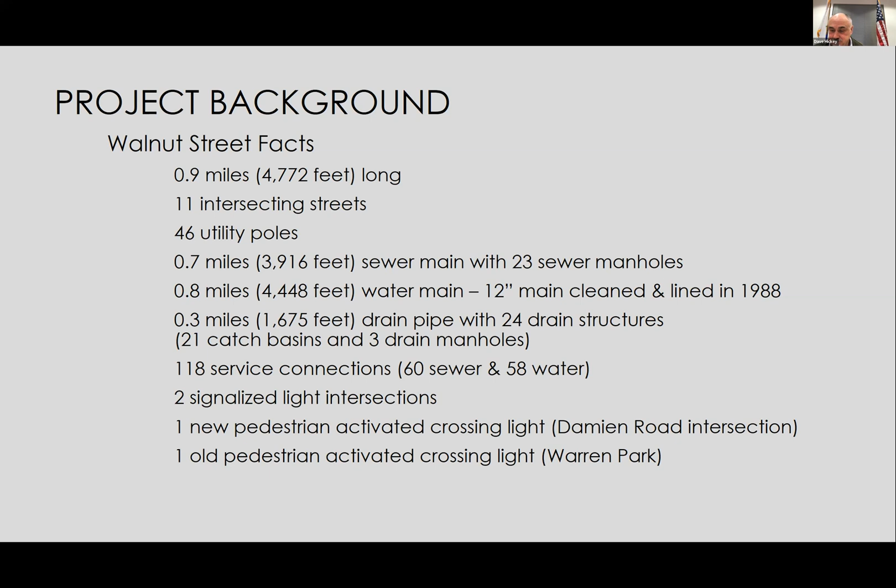Let's try to advance, Dave, since you're working it so well now. This has just got a little more background on the project. For the history buffs in the crowd, Walnut Street was laid out by the county commissioner back in 1886, just 5 years after Wellesley became a town, separating from Needham. It was widened and relocated in 1903, accepted by the town that same year - those probably were joint or parallel exercises. The right-of-way is 50 feet wide with about 30 feet of pavement and sidewalks ranging from 3.5 to 5 feet wide for most of the length on both sides of the road, but not all of it. That's an opportunity and a challenge we'll talk about in a bit. It is classified as an urban collector.

One thing that stands out, at least for me, is this 50-foot wide right-of-way. Sounds like a fair amount, but when you think of a pavement of 30 feet and 2 sidewalks that really should be 10 feet, you can see, and then you still have to fit utility poles, you can see how 50 feet can be a little bit constraining. We'll talk about that in a little more detail as we advance.

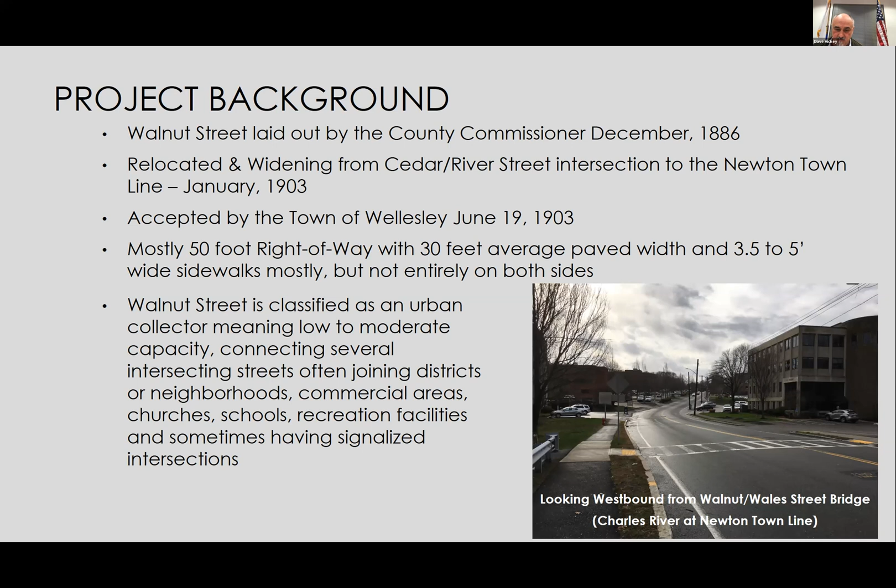I'm a little fearful that most of you are more familiar with these pictures than I would like. We know there are some potholes out there. We know that the condition of the pavement is subpar. And we know that the trenching work, particularly the National Grid trenching work that's gone over the last year and a half, is a problem.

The good news, if there is any for us in engineering, is that we've advanced 15 cores into the roadway, into the subbase, and the subbase looks really good. The asphalt thickness out there right now is thick, averaging 6.5 inches. So we're developing a plan that would cold plane or grind down the top wearing surface of the road that's lost its elasticity and structural capacity, and then replace that.

We might also look at some intermembrane layers that would put some elasticity and adhesion between the base course that would be left behind and the new wearing course. That's something we did recently on Grove Street, if anyone happened to see that process, and we've done it in several streets in town, and found it to be pretty successful. In some ways, it's the current replacement of that fabric you see in that left picture, only performing much better than that fabric, which was at its time state of the art for pavement.

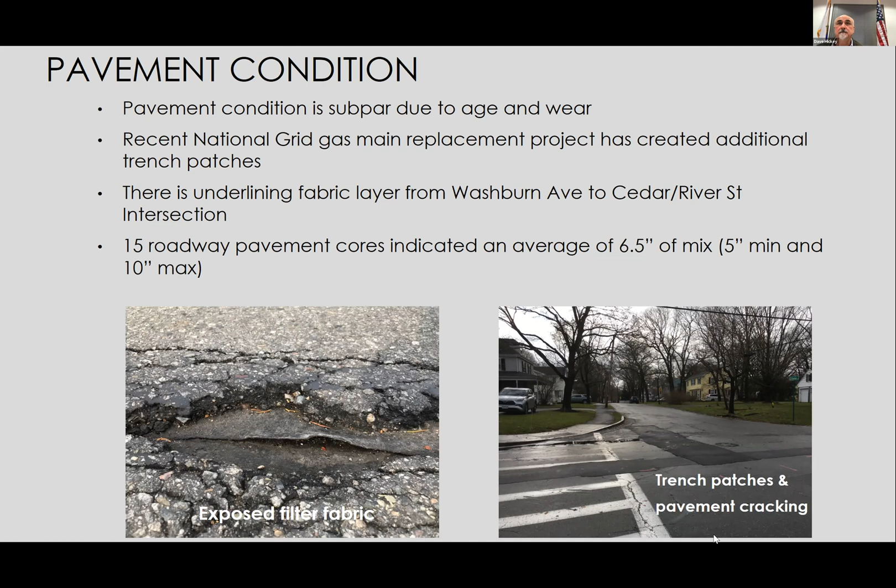The next few slides, I'd like to just talk about Walnut Street, its connectivity, and some of its most important street functions that I'm sure many of you who live there are familiar with, but maybe this is a bit of a reminder.

One of the most important things is that the Crosstown Trail runs parallel with Walnut Street for a long section, then joins up and runs contiguous with Walnut Street for about 600 feet. So it's an important connection point, and one that we want to think about as we consider reconstructing the road.

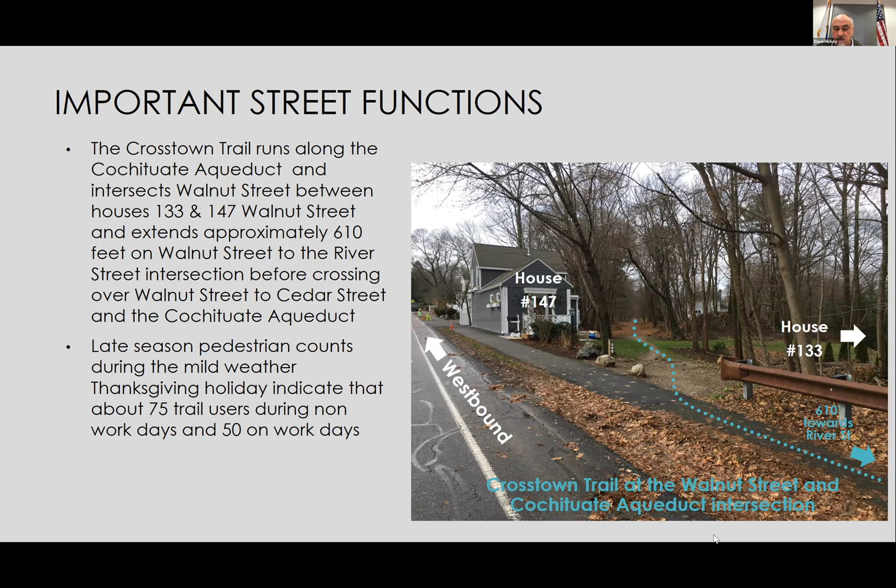We did some pedestrian counts on the Crosstown Trail itself. This was a while ago, after COVID, but it indicated that there's a regular amount of activity. We found 75 trail users during a weekend and 50 on a weekday.

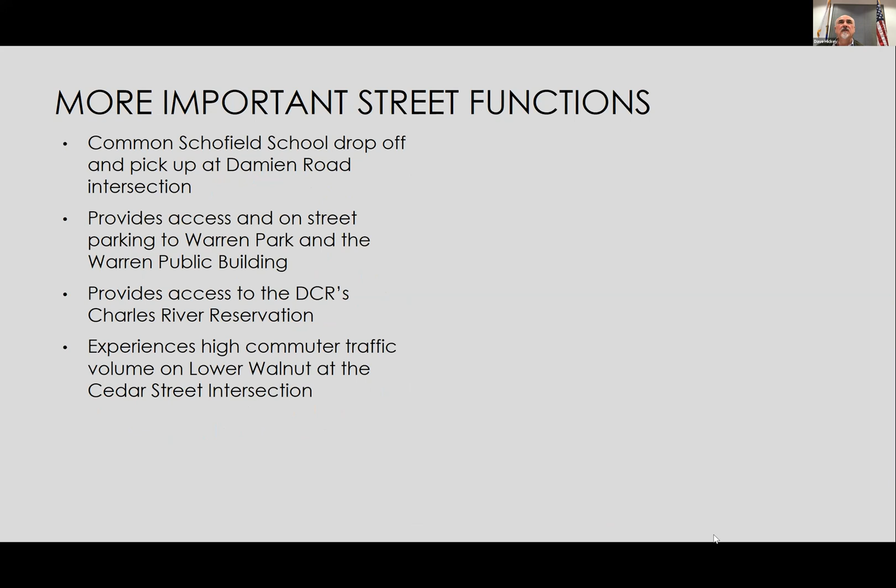Some more important street functions: on the westerly end of the project, one of the most important parts is the Schofield School drop-off, which occurs right at Walnut and Damien. If you click once, a picture comes up showing the proximity between Walnut Street and how you can go down Damien, which is a somewhat low-traveled road, to get to the Schofield School fairly safely. So it's a popular spot for drop-off and pickup.

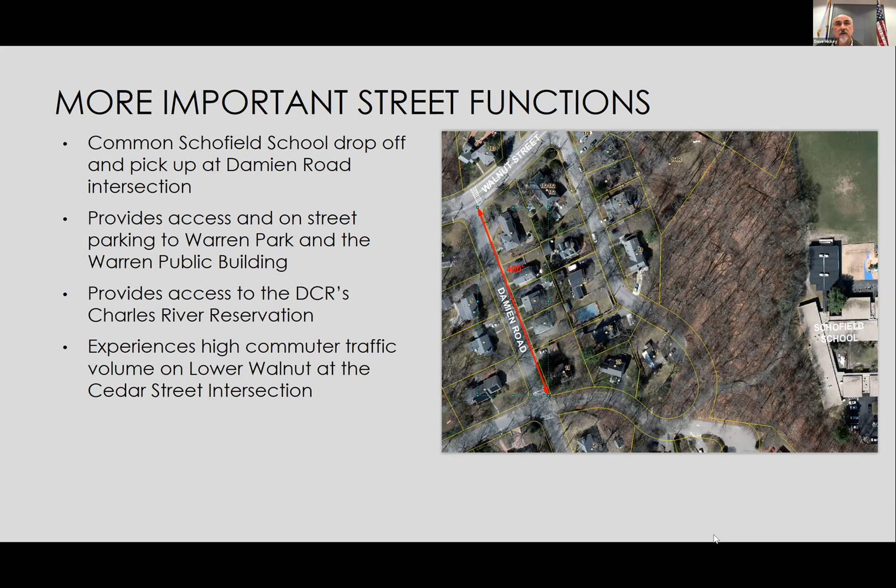If you click again, one of the other important functions is that on one end of the street, we connect to the DCR's Charles River Reservation and the Cordingley Dam. This is a stock photo I popped in there, but it's a real hidden gem, I think, in Wellesley by many people's opinions, and Walnut Street is not too far from connecting to that.

On the opposite end, the westerly end, we've got Warren Park, which is a pretty well-used park, and the Warren Building, which has our rec department in it. There's some on-street parking there, so it's an important function we need to preserve.

Another interesting thing: we've gotten into the habit of calling Walnut Street 'Upper Walnut,' being the section from Washington to Cedar, and 'Lower Walnut,' which is more of the commercial end. It really is the tale of two roads, if you will. We'll show you some traffic data in a minute that puts some numbers to that.

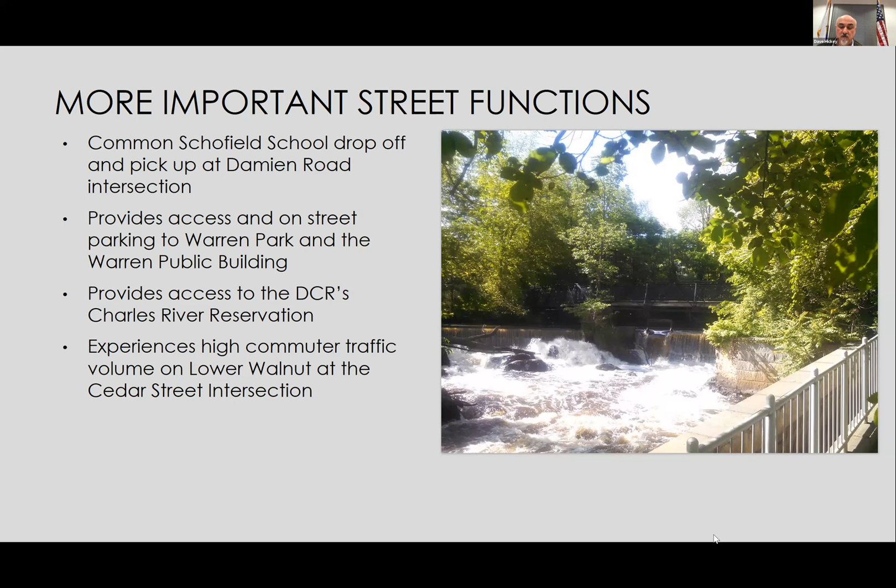So from here, we thought we'd try again to launch another poll and just get an idea of how you use the street right now.

What if there's more than one answer? I do both. It's a great point, it's not an easy question. I guess I would ask you to answer with what you think is the most important function. Well, if we live on Walnut Street, they're all equally important functions. That's right, fair enough. Point made. I agree, walk and drive are the two most important. Bike is good, but walk and drive are crucial. Well, that's great. I think from there we'll end that one and we'll move on.

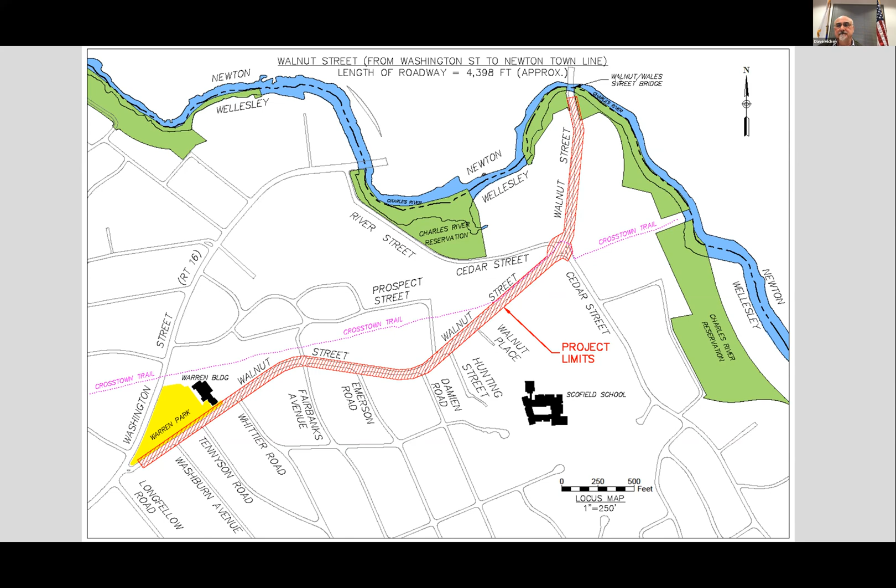All right, so here's just a little bit of traffic. Again, I'm trying to share some of the background we've got as we think about the final design of this project. This is some data from 2020, so it's a little bit aged, but it gives you an idea of that tale of two streets, from Washington to Cedar.

The average daily traffic is in the 1,500 to 2,000 vehicles per day range. But from Cedar Street down, headed toward Route 128, it jumps up to 6,000 to 7,000 vehicles per day. Probably no surprise - it's the commuting connection link to Cedar Street that drives those numbers higher. The 85th percentile speed gathered for this study was just a little over 31 miles per hour, which is above the common speed limit of 30 that applies to the street, but not alarmingly above.

We also reviewed the accidents. In 2018, there were 3 accidents. In 2019, 3. In 2020, 4. I think the high was 7 in 2017. Keep in mind, these are accidents that get reported, and therefore is data that we can review. There could be more, but this is what we're able to access. It tells us there's a steady stream of accidents, but the numbers are pretty low compared

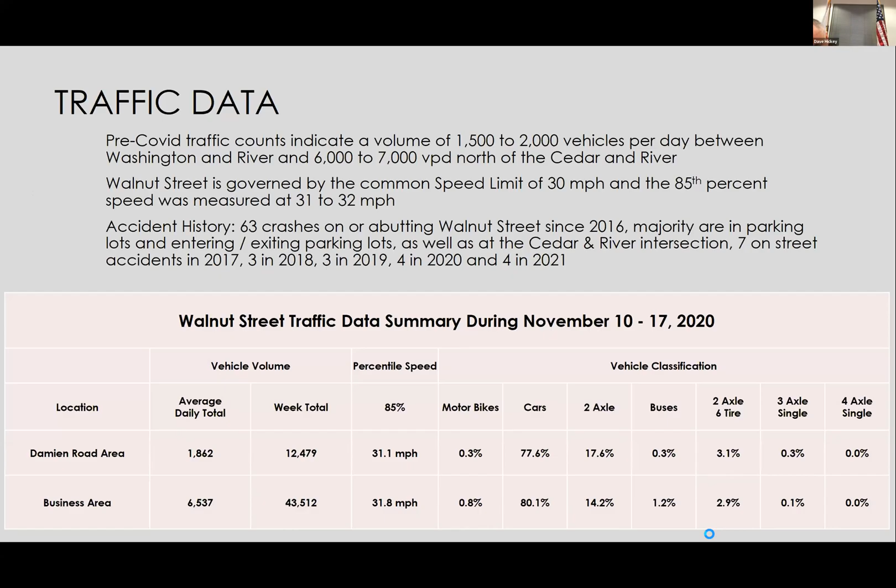So advancing along. Some of the things we want to focus on, some challenges and opportunities, are that a collector road like this should have continuous sidewalks on both sides. Most of Walnut Street does. There is a gap right now between Hunting and Cedar, and it would probably be used less than some other sidewalk sections, but it's something we're looking at that should be included in this project. It's a little challenging—there are some grading issues and existing driveways that will make that difficult, but we think it's important.

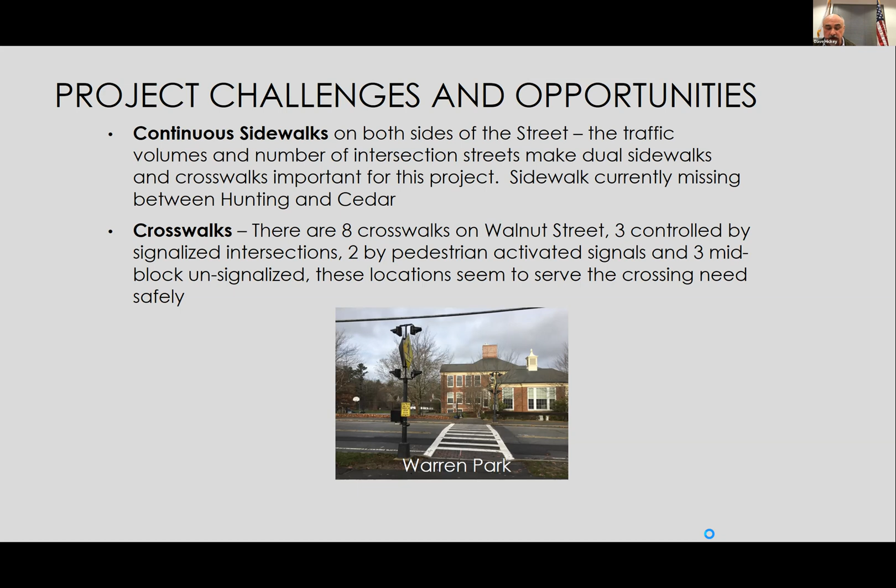We also think crosswalks are something the design has to pay a lot of attention to. Clearly there is a steady stream of traffic. The numbers are not huge, at 2,000 vehicles per day, but it's important to bring pedestrians to a logical place and cross them as safely as possible. I think the corridor right now is fortunate in that it has some signalized lights as well as some pedestrian-activated lights. We certainly intend to preserve those in the case of Damien, which is fairly new, and update the other existing pedestrian-activated ones to the rapid flashing beacon that exists at Damien.

Any speed bumps being considered? Particularly around Warren, as I have personally seen young children run out, and that's what really scares the bejesus out of me. And it's a good fear. There are clearly a lot of kids that use the park.

I think what I'll do is jot that down and hold that question to the end, if that's all right with you.

Curbing is another thing—we're working through a video review of the infrastructure that's out there. We're finishing up the drainage this week, and it looks pretty good. If there are some improvements to drainage and sewer, they're fairly small compared to the rest of the pavement work. But curbing is another thing we see as a challenge for the project.

We think if there is on-street parking, such as at Warren Park, it's appropriate, much like that picture on the left, to have granite curbs whenever the sidewalk is right to the edge like that. It doesn't necessarily deter or steer a car away, but it does give a small amount of protection to a stroller, a walker, or whatever might be on the sidewalk when the sidewalk is right on the road edge.

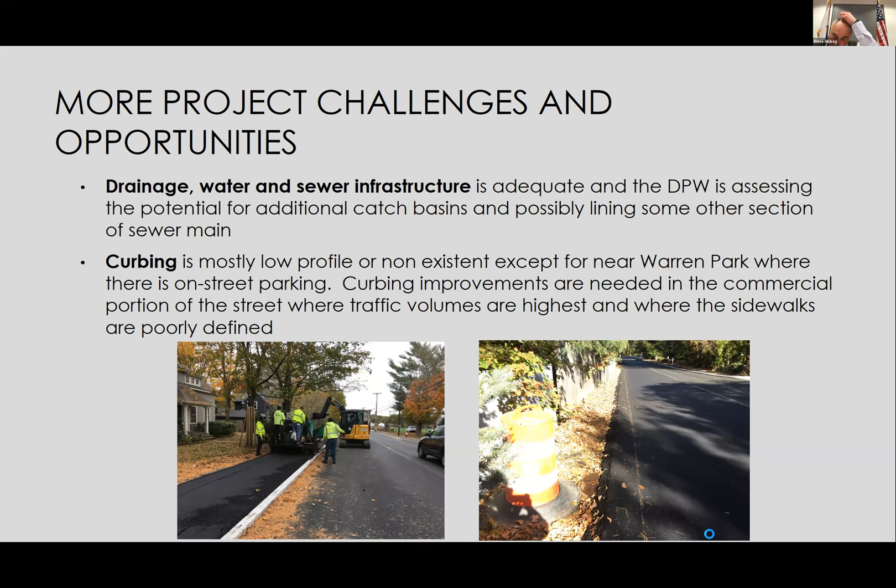From here, we want to go into complete streets. So it sounded like some people were familiar, but just as a basic introduction, complete streets is an effort to re-envision how we use our public right-of-ways in a way that would be more inclusive for all modes of transportation. The basic requirements are to provide safe, accessible options for all the travel modes.

So walkers, bikers, transit users, vehicles, and people of all ages and abilities. As we design this road, and as we've designed roads in Wellesley over the last 8 or 10 years, we need to really consider how we're using the road now and how we might use it in the future. That's one of the main reasons to have this meeting tonight, is to get your thoughts on that.

Since not a lot of people said they were familiar with it, I figured I would give you some state statistics. Right now, Massachusetts has become a bit of a leader in this complete streets initiative. It's a global thing that's going on. It's happening in Europe, it's happening throughout the United States. Our MassDOT put out some fairly rigorous training 8 or so years ago, and most of my staff have been through that training.

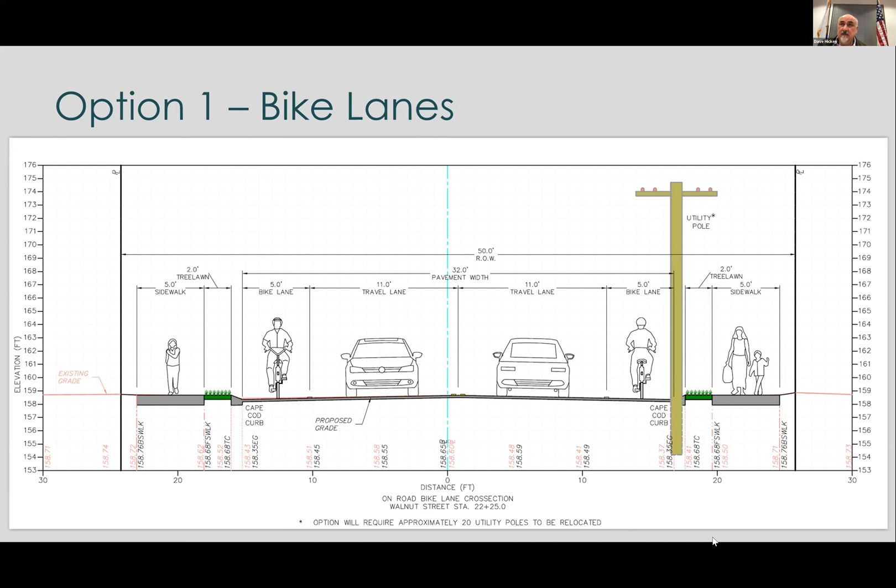Advancing to option 2. This is the Sharrows concept, which encourages the cyclist and the motorist to share the space. It would be the smallest pavement width, so you can fit a drive lane and a fog lane. It gives a little bit of space for bicyclists and vehicles to solve their conflicts. We would recommend, if this is the direction the town wants to go, a paved width of about 26 feet, and again sidewalks on both sides, as shown in this concept.

And you can see one of the impacts of something like this, where you're able to narrow the road, is not only is there a little less imperviousness, but you have a little more flexibility with where the utility poles are likely to fall. And if they can fit into that grass strip area, maybe fewer utility poles have to be relocated.

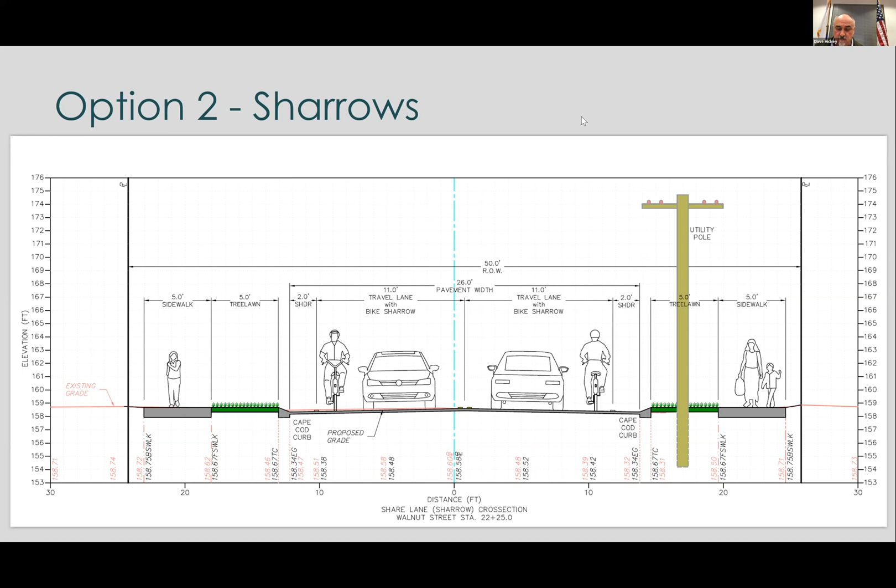And option 3 is something that came—I'll share that we've taken these early design concepts to our traffic committee, as well as the town's mobility subcommittee of the climate action committee. There seemed to be some feedback from both of those groups that said a multi-use path might make a lot of sense here.

So that's what this third option is showing, where we would still have a sidewalk on one side, but we would make a slightly wider sidewalk on the other side. In this case, it would be the north side, or the side that connects the Warren Building and the Crosstown Trail and the DCR Park.

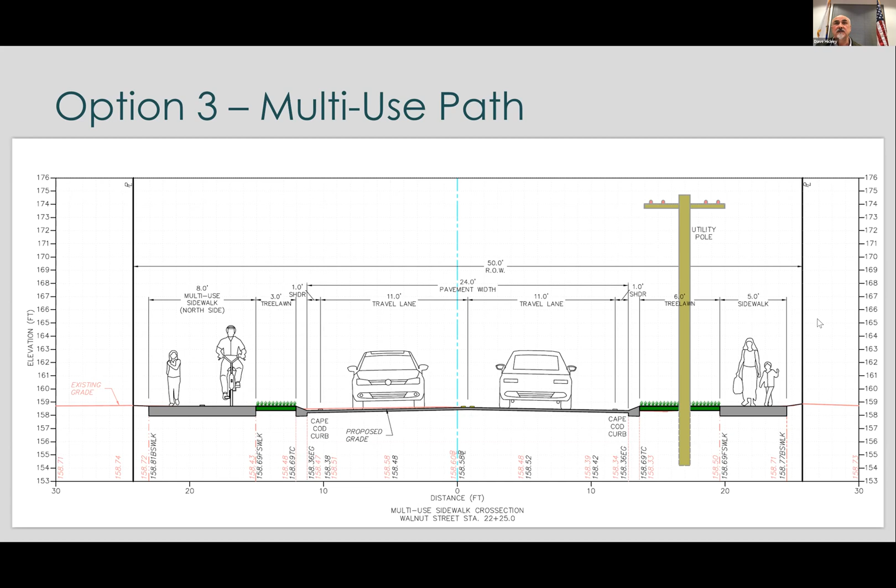I'm guessing some questions are popping up in the chat, but maybe before I get to them, we can launch our last poll question. You've heard me talk, hopefully not to the point where I've exhausted you, but to the point.

Oh, okay, yeah, I would skip to the next one, I must have missed that. So you've heard me talk about option 1, 2, and 3, and maybe just based on our audience tonight, option 1 being bike lanes, option 2 being sharrows or share the road, and option 3 being a multi-use sidewalk on one side.

Hey, Dave, can I ask, what is the width of the street today? On average, 30 feet.

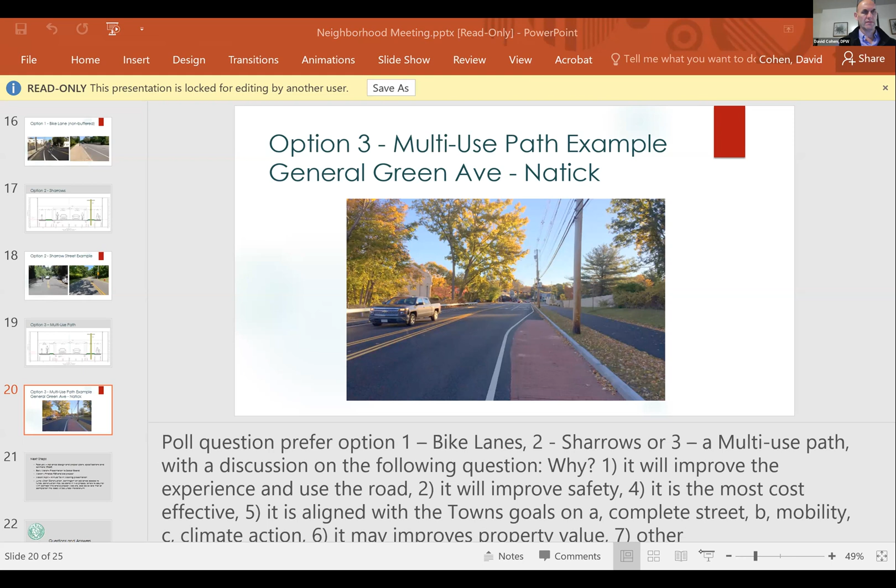Hi there. So are you saving the chat so you see these comments, or does it all just go away? We will save the chat as well as the transcript of the meeting. Okay, and lastly, I just didn't hear anything.

Maybe it wasn't mentioned because it's just one area, but in the chat I mentioned the right turn going eastbound on Washington Street onto Walnut, and it's really, really tight. I'd be surprised if anyone's able to stay in that lane easily. It's something you guys should consider, because the way it's drawn up is definitely not adequate and not safe for anybody in either lane. So just something to consider as you do this on that corner.

Certainly we can. Some of that was repaved as part of the Washington Street project. But Zach, can you give me a little latitude? Which turning movement are you talking about?

Yeah, so it's in the chat as well. But if you're driving eastbound on Washington Street and taking a right turn onto Walnut Street, right where Louise lives, where she said people go really fast - even if you're going slow on that turn, you're immediately in the opposite direction of traffic every time.